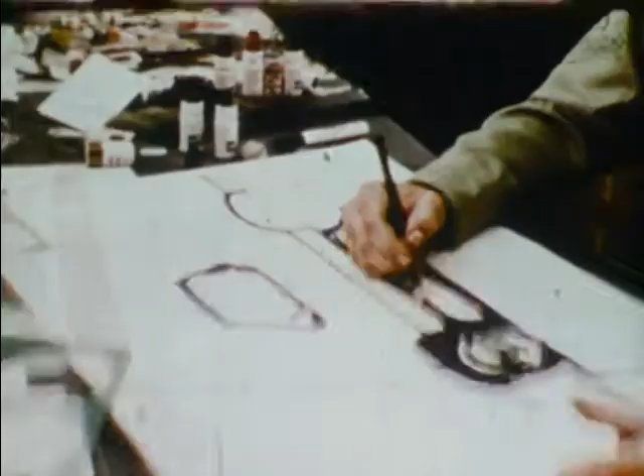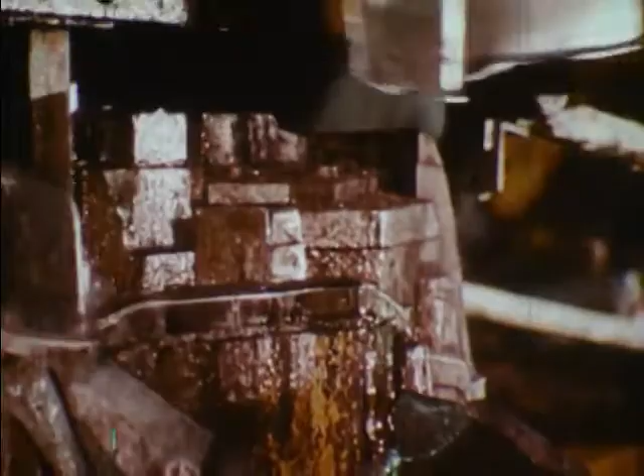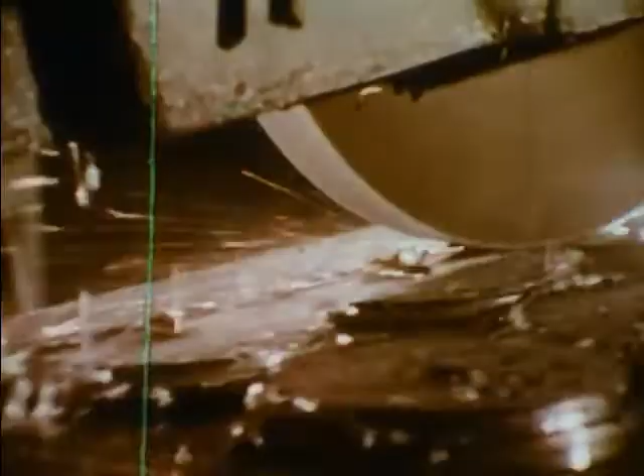What you gonna do when the time comes and you have to earn your way? What you gonna do when the time comes and you have to earn your pay? What will you do when you're finally on your own?

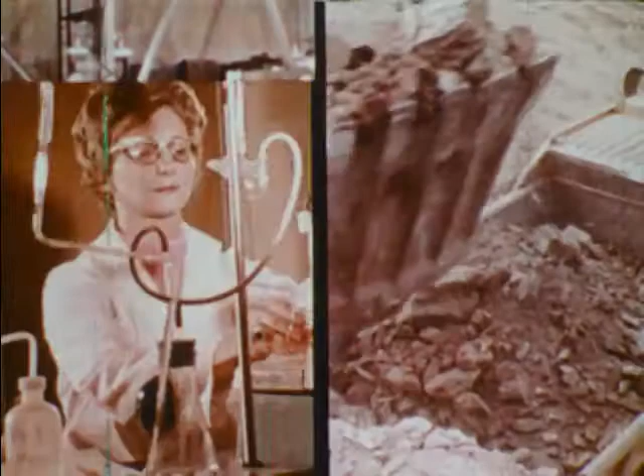Sooner or later, each of you will say goodbye to your classrooms, to enter the world of work. A world none of you made, but you can help make better. A world that permits you to be self-reliant, to pay your way from the salary and wages you earn for work performed in a variety of career occupations.

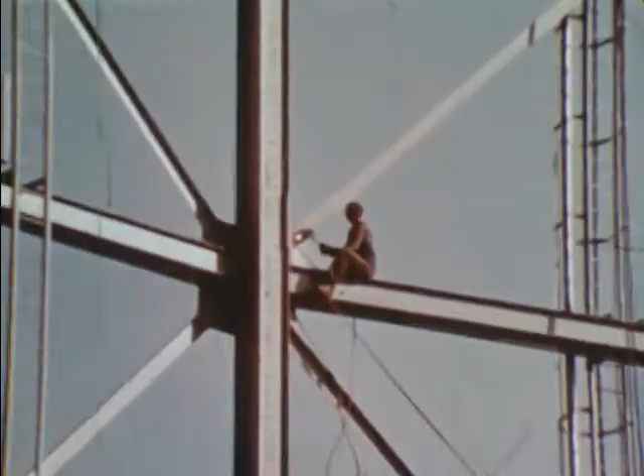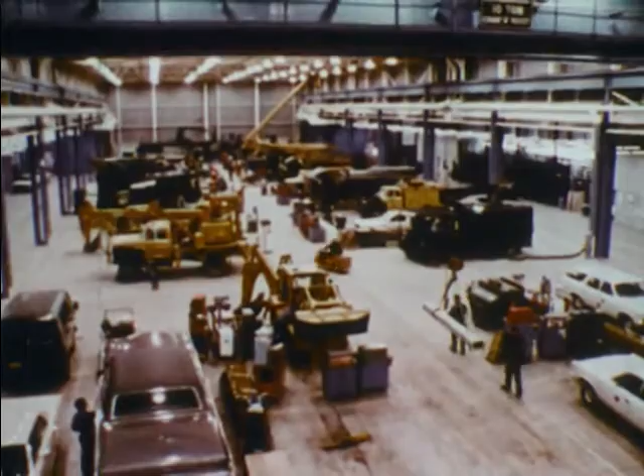Time spent now, planning for that world, may be the best investment you ever make. This film will tell you about one career area, open to young people, mostly young men. Before it is over, you should be able to answer for yourself the question, is a career in machining for you?

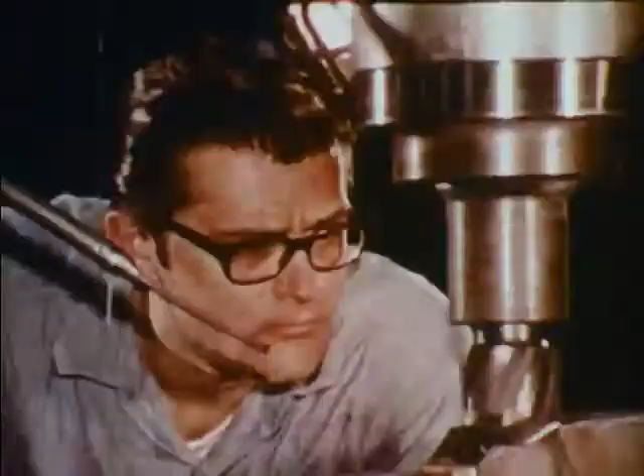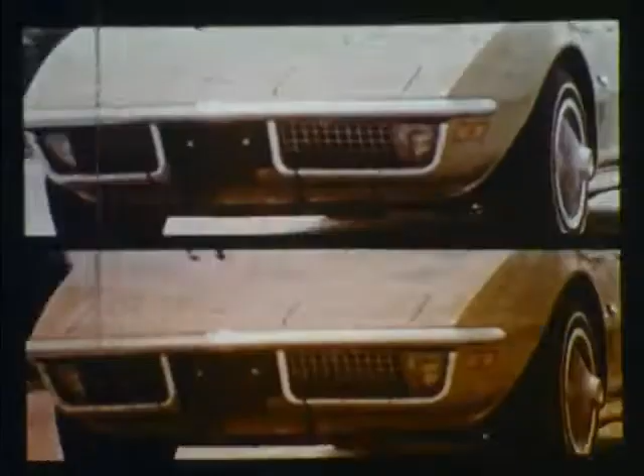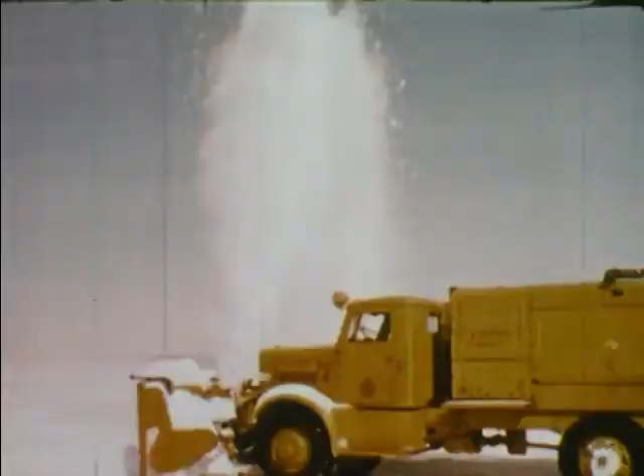The wonderful machines of today and those of tomorrow, amazing to everyone, young and old, those inclined toward engineering as well as those merely curious. You yourself, no doubt, have watched these machines in action, at construction sites, on the road, in laboratories, on the TV screen, surprised, many times astounded by the complexity of their many parts.

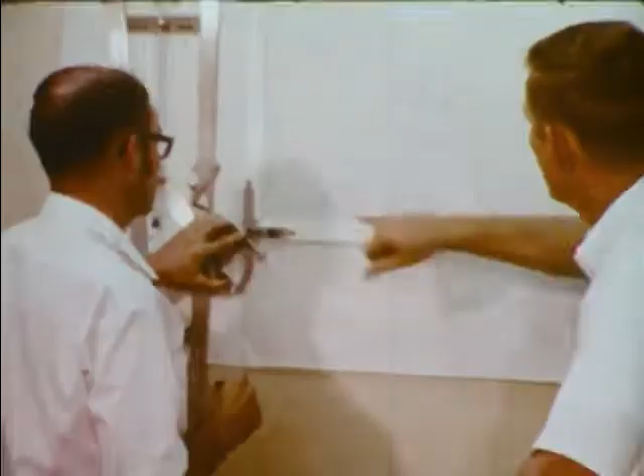But do you wonder how these machines came into being? Not only how they are invented, laid out on drawing boards, but who it is that takes raw metal and cuts and shapes, drills and fits all the parts so that they assemble first into prototype design models. Prototype models that serve as patterns for the thousands and thousands more to be produced on assembly lines.

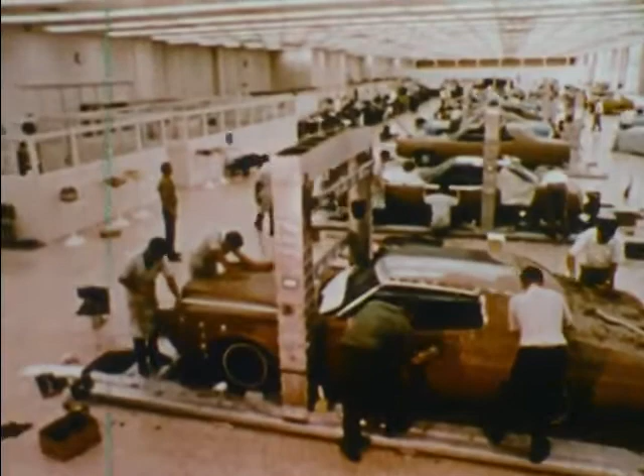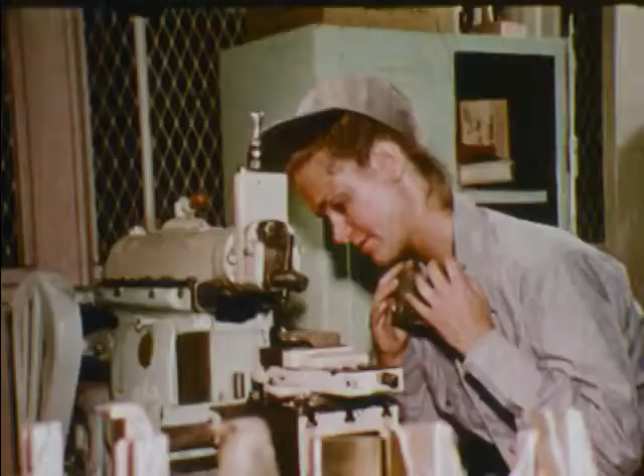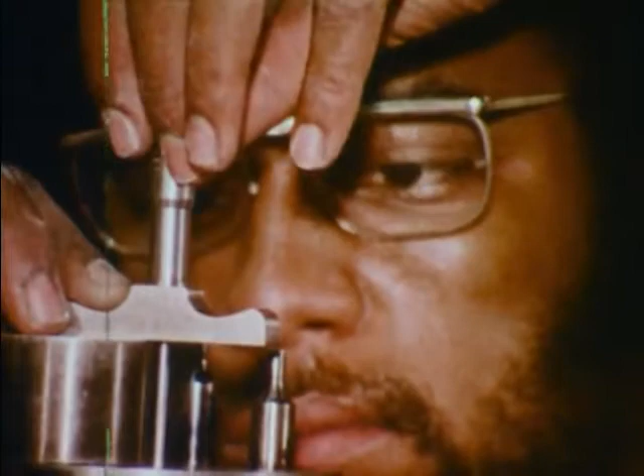If actual fabrication of machines interests you, if cutting and filing and grinding metals of all kinds, and other materials too, have a fascination for you, if making and fitting parts together the way a blueprint will tell you to, working to tolerances as close to 10 millionths of an inch, then you may be in line for a job in machining.

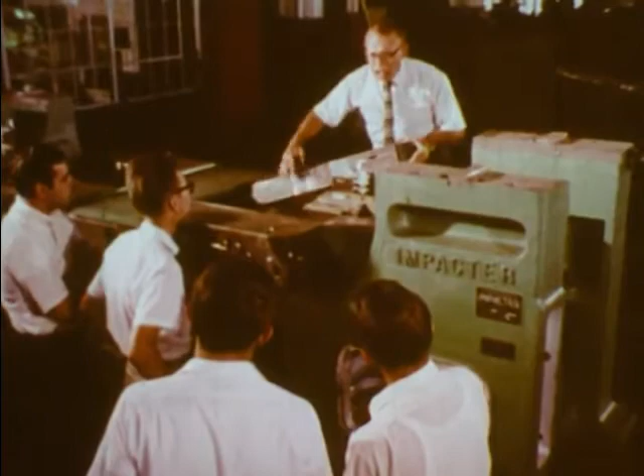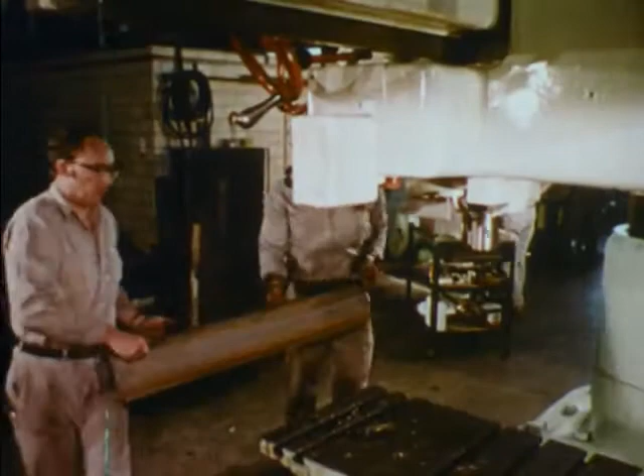Job specialties employing over 1 million skilled people, paying well above average, providing training to young people for continuous improvement in their skills, and still better salaries. One warning: physical demands on machining workers can be great, more than many women are willing to stand.

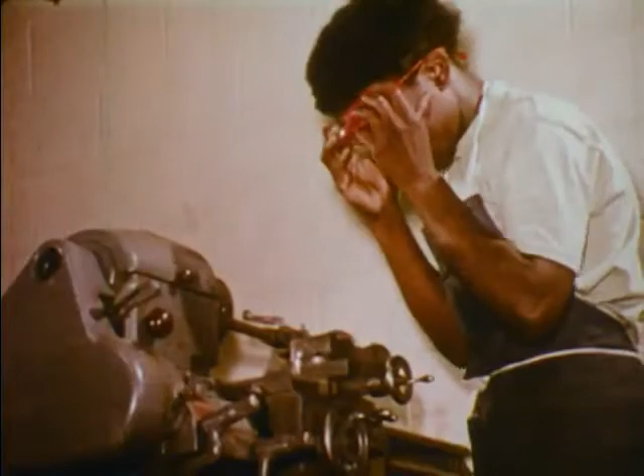Okay, you say, maybe that could be my thing. Work with my eyes and my hands. What about a machining job? Is it a dead end? Can you get ahead? Good question.

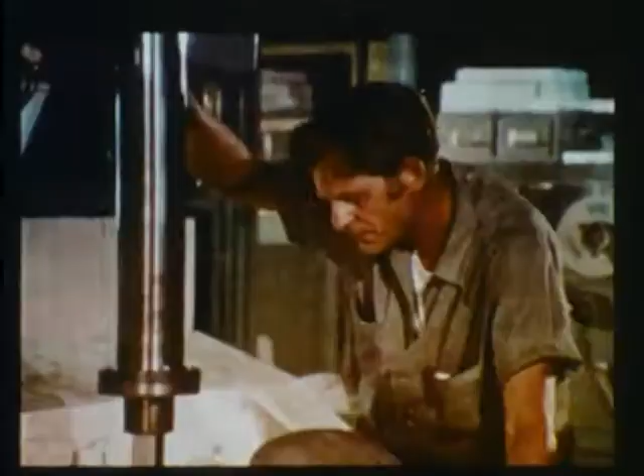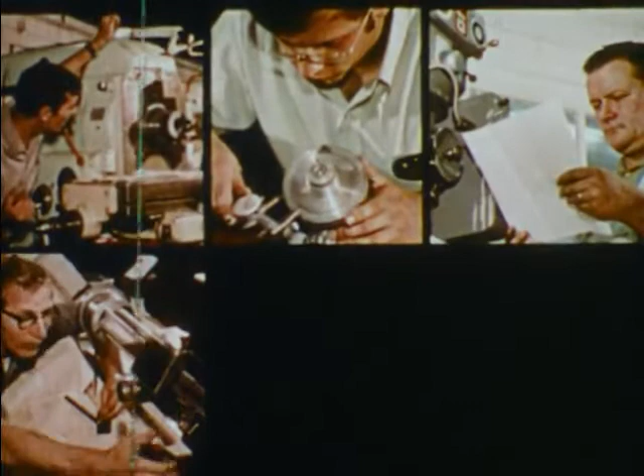There are workers at many job levels in the machining occupations. Each level is an opportunity for advancement. Among the skilled are all-round machinists, tool and die makers, instrument makers, machine tool setup men, and layout men. Then there are machine tool operators, the largest category and less skilled.

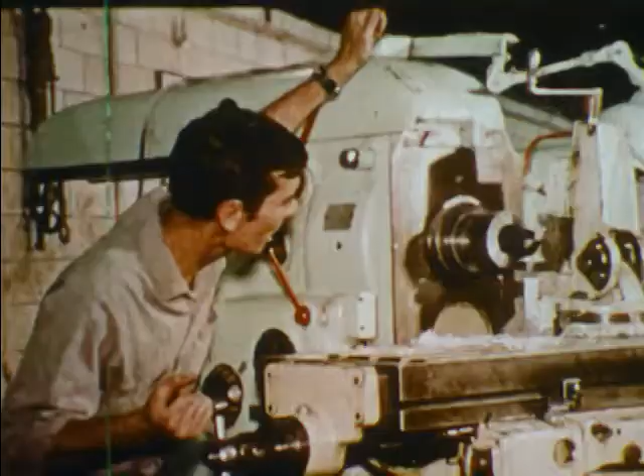Like to know what an all-round machinist does? Putting it simply, you might say he uses machine tools to make metal parts. He may set up and operate every one of the machines in this large shop.

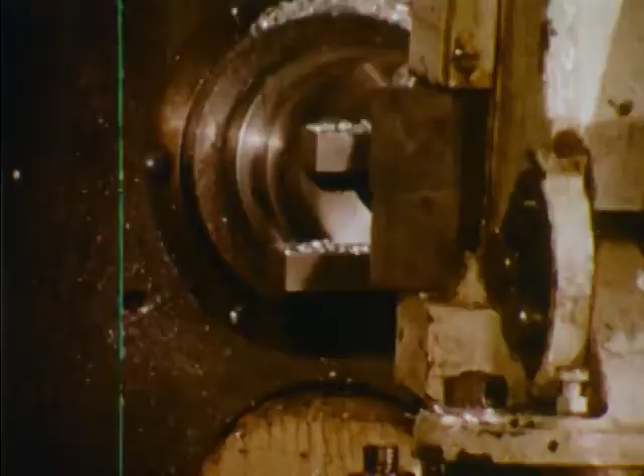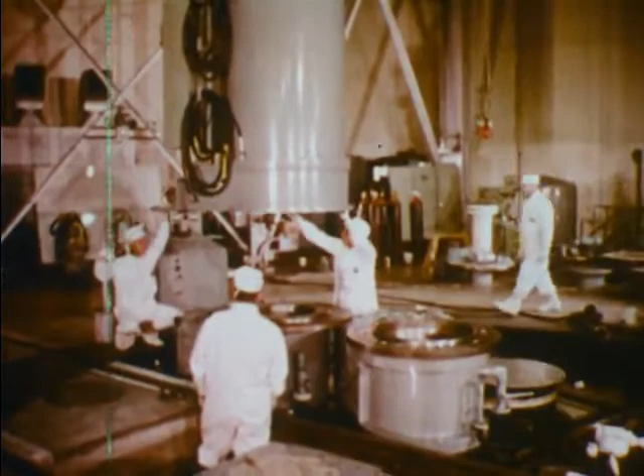When the machinist turns this block of metal into the intricate part called for by precise specifications, it could be a part for this unusual vehicle used at airports, or a part for a new type of generator being installed in a nuclear power plant, a part for any of 100 different modern machines.

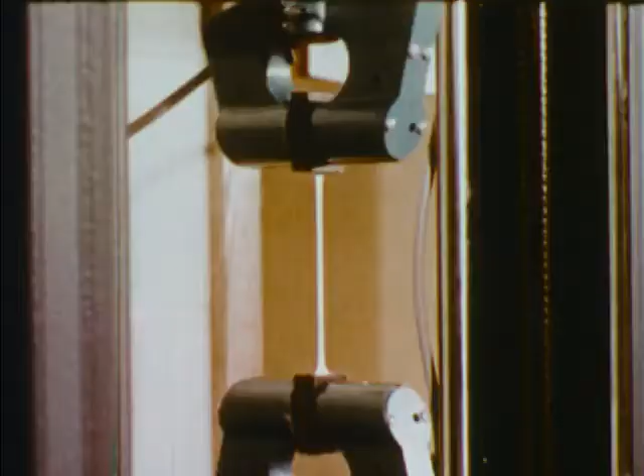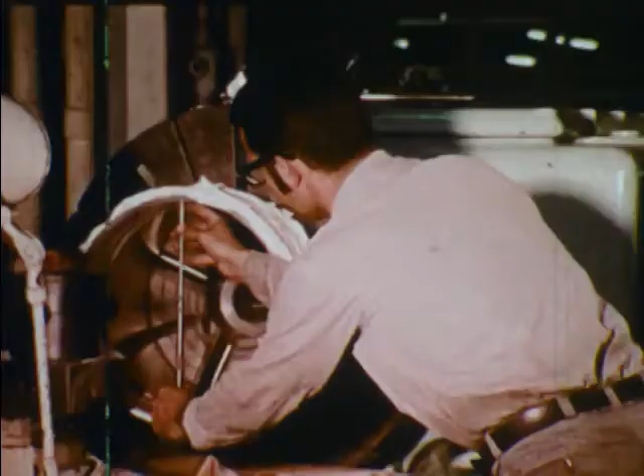Because machinists understand what each machine tool can do, and because they know the working properties of many metals and plastics, all-round machinists can plan and carry through the operations necessary to machine a specified part. The skill of the all-round machinist is reflected in the accuracy of his work, and he constantly checks using precision measuring instruments.

Often, the machinist finishes the work by hand and assembles the parts by hand.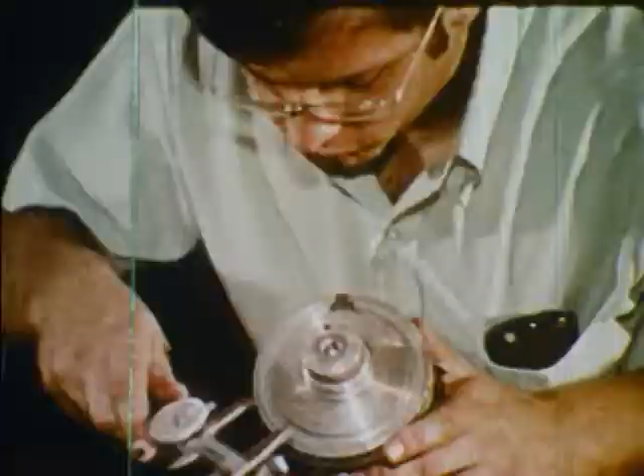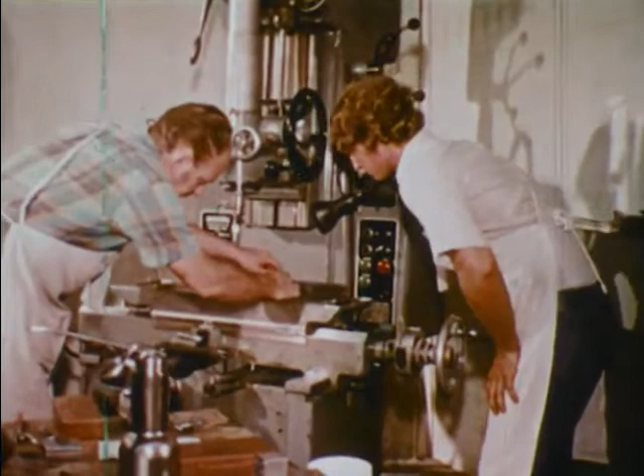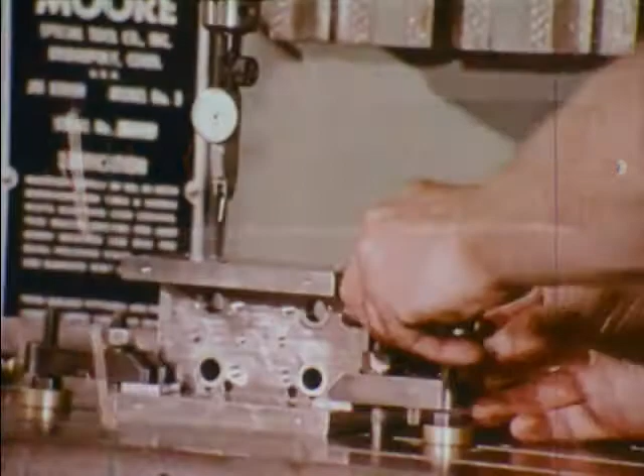Tool and die makers are highly skilled and creative. Their products, tools, dies, and special holding devices, are the basis for mass production in metalworking. Tool and die makers know how to use almost every type of machine tool and precision measuring instrument, have a broad knowledge of shop practices and mathematics and of all manufacturing metals and alloys, and can do precise handwork. Tool makers are rated high among machining workers.

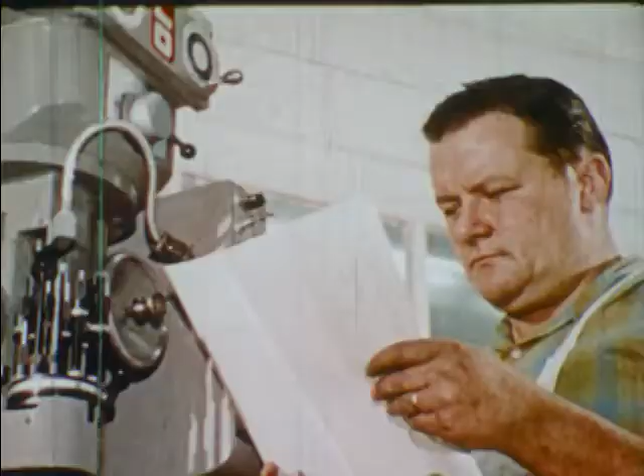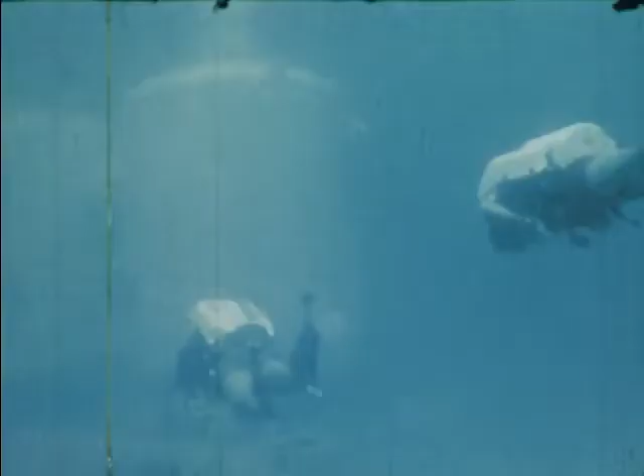Scientific and engineering research in medicine and medical devices, research in space machines, research in pollution, in underwater living, are translated into laboratory models by instrument makers.

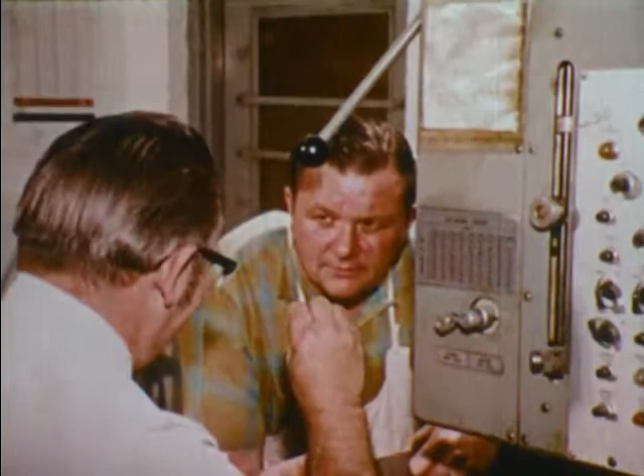These skilled people work from rough sketches or detailed blueprints, many times from a verbal idea. Their skill in operating machine tools, as well as their ability to handcraft metals, enables them to develop parts which do not vary from specifications by, at times, more than 10 millionths of an inch.

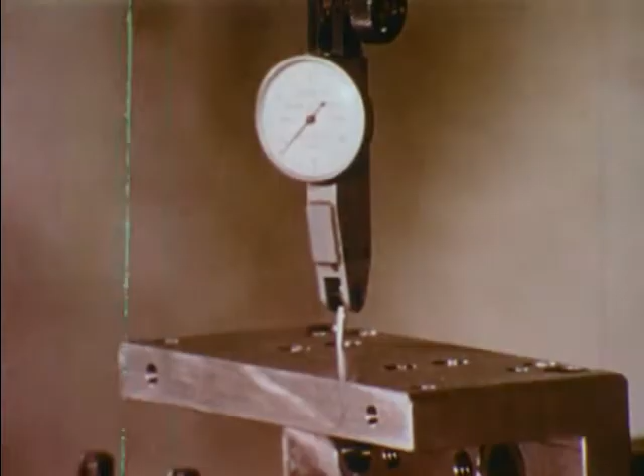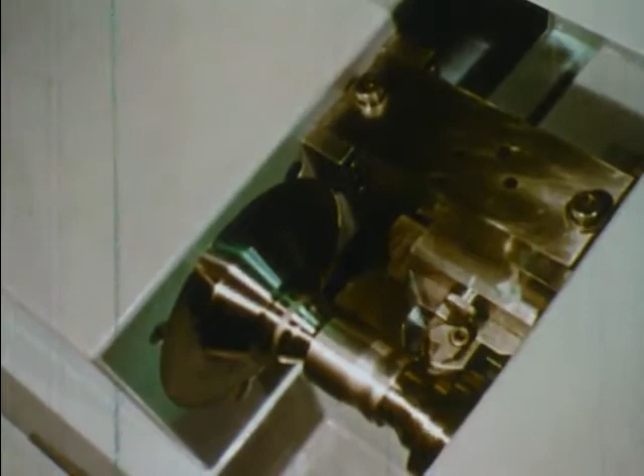Plants and machine shops that do large volume machining use skilled specialists, setup men. They are the ones who set up the machine tools so less skilled machine tool operators can use them. They set the operating speeds, operating sequences, adjust the guides, stops, and other controls. Although many metal cutting machines today are controlled by punch tapes, the setup man has the job of making sure the machine is operating properly.

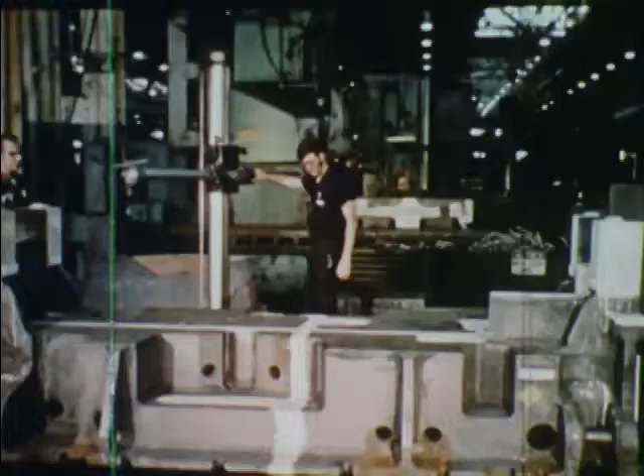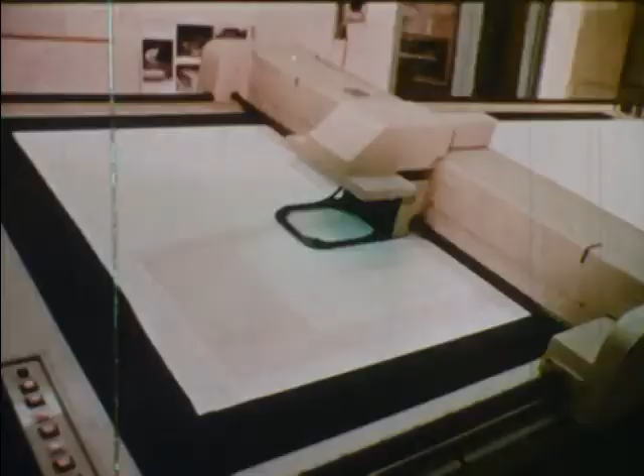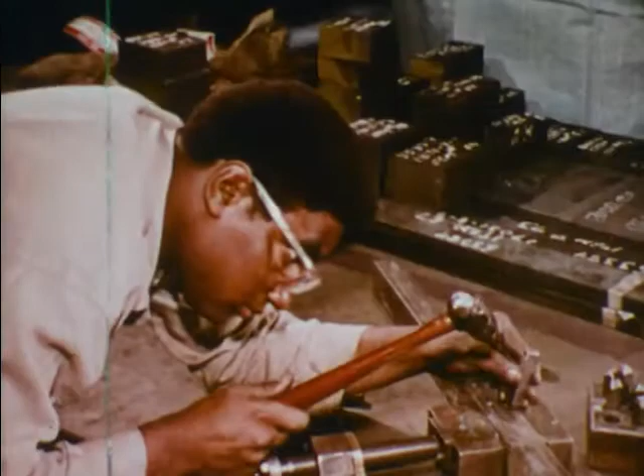Another type of skilled worker, the layout man, marks metal castings, forgings, and other metal stock to indicate where and how much machining is required. The layout man uses many instruments to prepare a piece for machining. He must work with extreme accuracy. He's familiar with the operation and capabilities of all standard machine tools. His instructions are easily followed.

Machine tool operators work with a variety of machine tools, though most of them specialize on one or two.

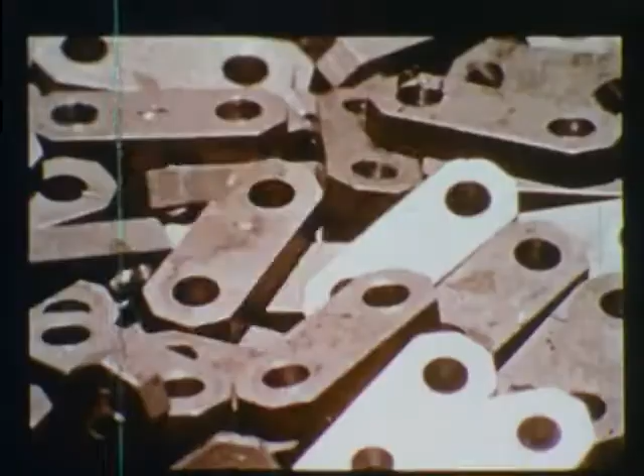These are the tools that turn out the thousands of identical parts needed on lines, where all sorts of products are assembled, from trucks to typewriters, cranes to computers.

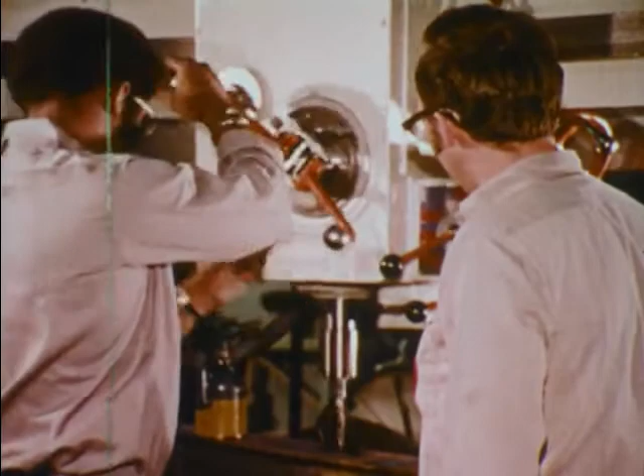A machine tool operator places rough metal stock in a machine tool and makes minor adjustments as necessary. The operation sequence and speeds have been set in the machine by a more skilled worker. With experience and training, the machine tool operator can advance to a more skilled category.

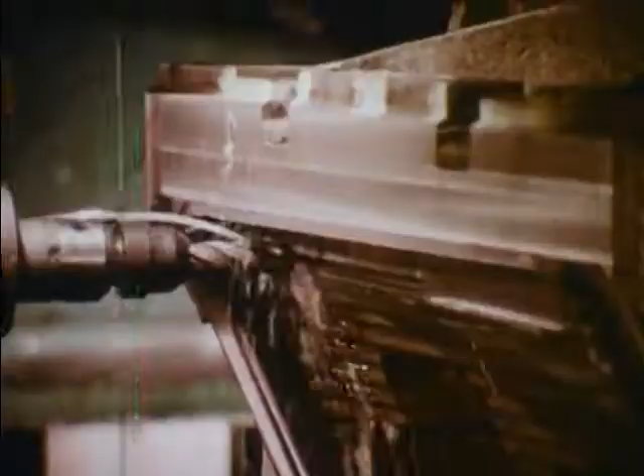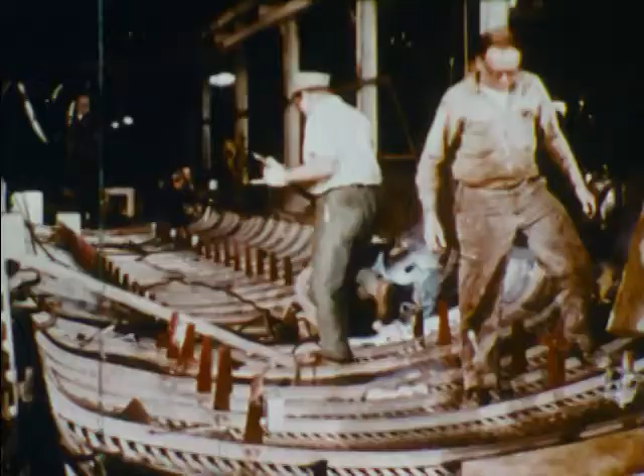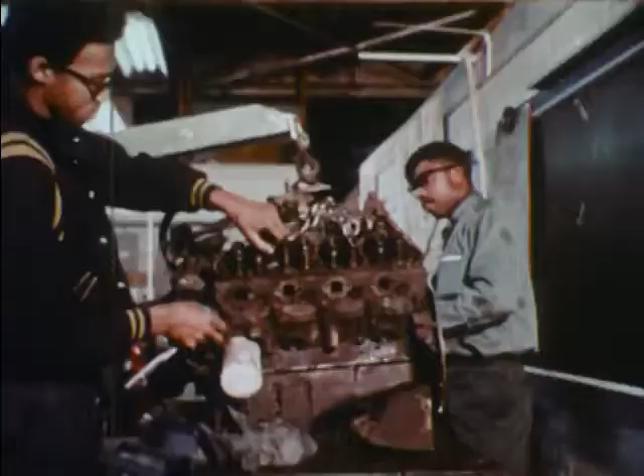Where will you find all the people and all the machines you've seen making everything? You'll find the bulk of the more than 1 million machining workers where machinery is being built: transportation equipment, fabricated metal products, electrical machinery, and electrical equipment. And you'll find some working in railroad repair shops, in maintenance shops in textile factories, and paper, glass, and chemical plants. And of course, in the armed services.

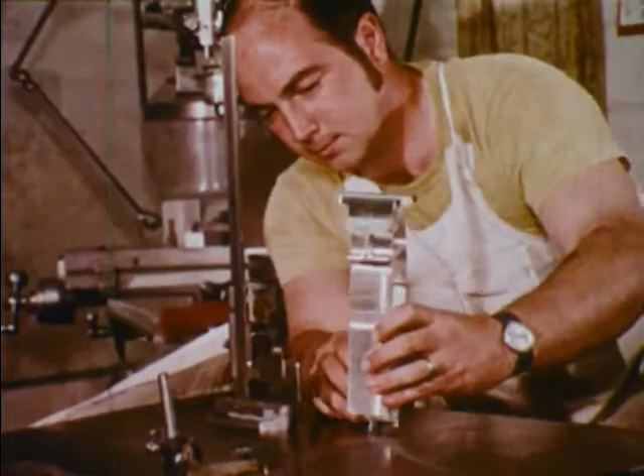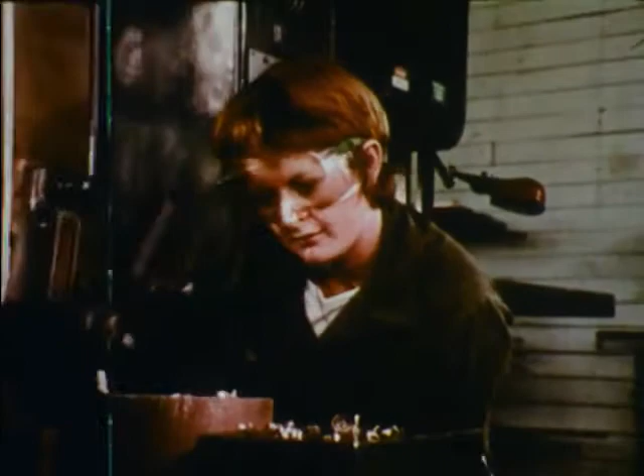Other machining workers are employed in research laboratories where unusual creative ability is required to carry out the requirements of research scientists and engineers. And machining workers are required by the armed forces at military facilities throughout the world, where they repair and modify metallic and non-metallic parts for all types of military machines.

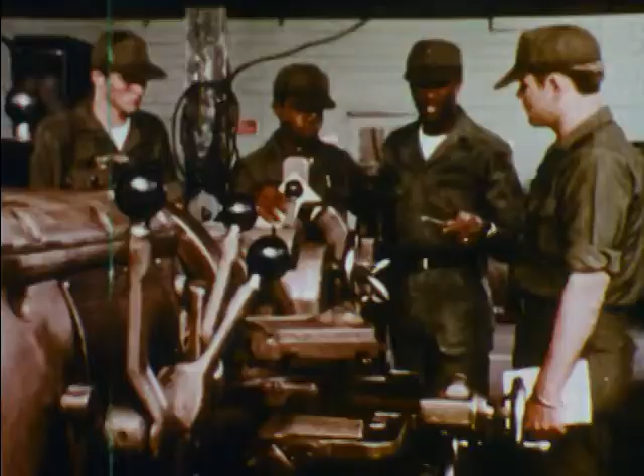Training in the armed forces includes learning how to operate all types of machine tools, which enables service personnel to get high-paying, interesting jobs in industry when their time in the service is completed.

You'll find that wages in the machining occupations compare most favorably with those in other industrial occupations. Rates vary in different areas of the country.

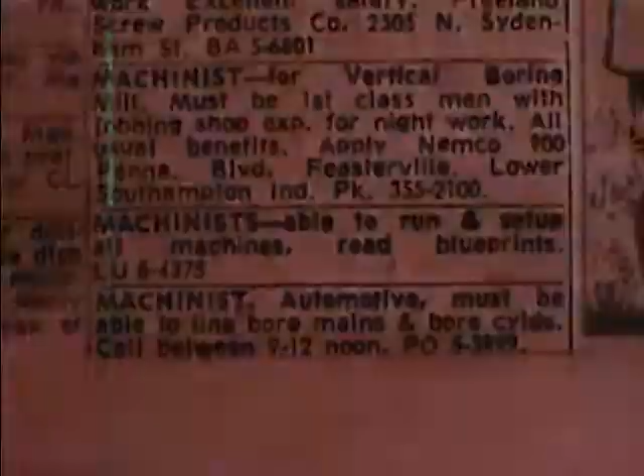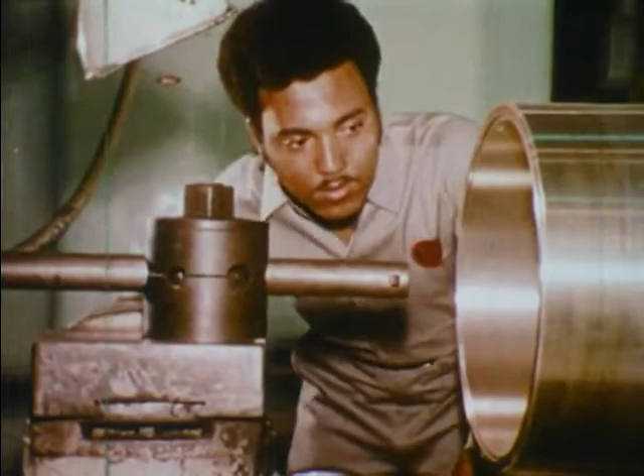Apprenticeship is the usual way you enter the skilled machining occupations. Tests and interviews help determine whether an applicant has the aptitudes and temperament to perform this type of exacting work. Good vision and judgment of depth and distance are a basic requirement, as is good hand and eye coordination.

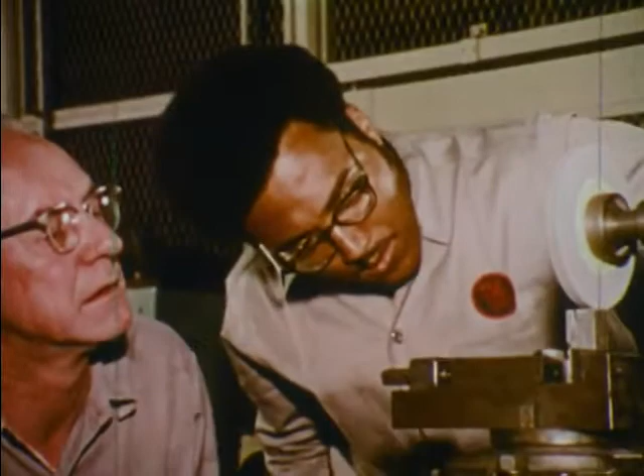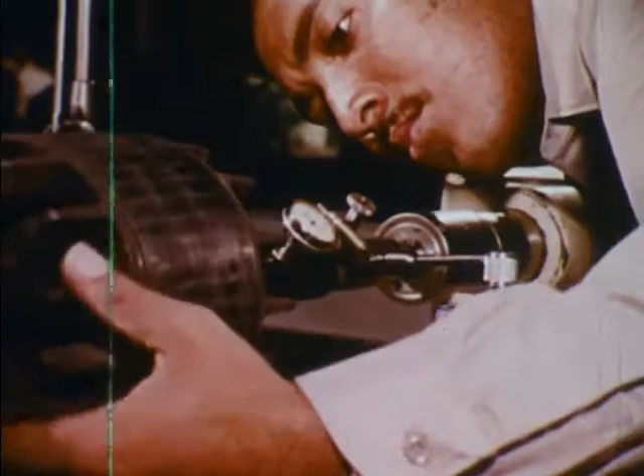During the apprentice's formal on-the-job training period, he learns all aspects of his chosen work. He gets to know the hand tools and the different machines, their operations, their capabilities. He's taught the use of measuring instruments, from the very simple to the very complex.

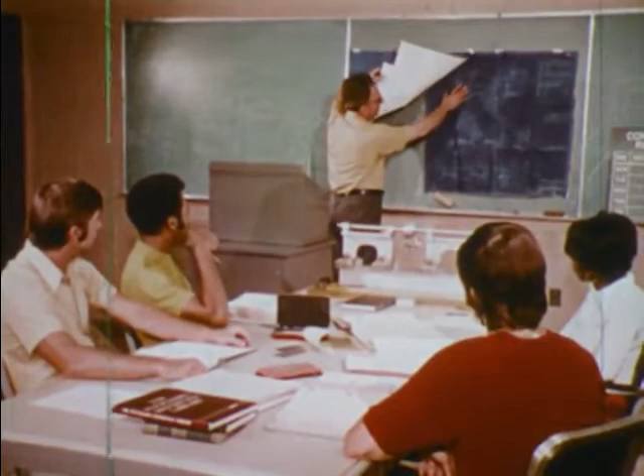Classroom training includes blueprint reading and mathematics, usually taught in the local high school through special arrangement with public school authorities. Those with special aptitude may become programmers, preparing the coded tapes which operate numerically controlled machines.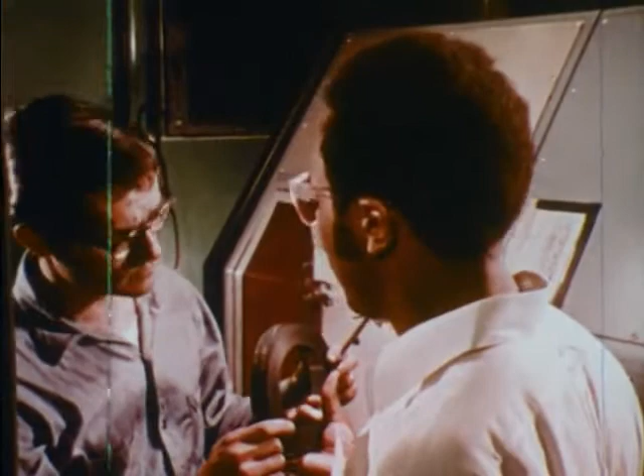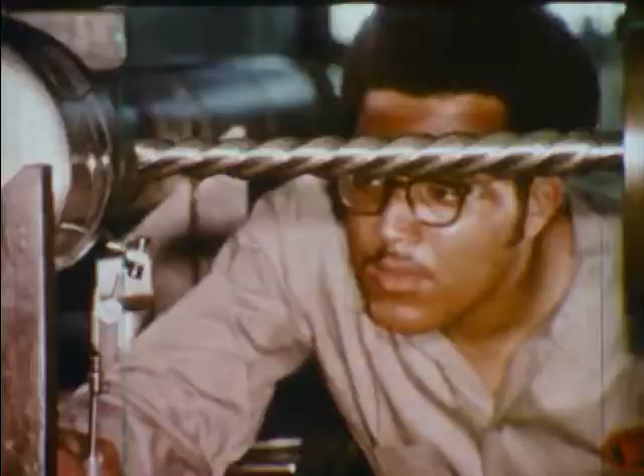Many move ahead to become machinists, tool makers, instrument makers. A good many advance to supervisory positions and to technical positions such as tool and die designer. Some open their own shops, becoming subcontractors to the firms they originally worked for.

Since industrial plants and research establishments requiring machining workers are located in almost all parts of the United States, you can almost pick the section of the country in which you'd like to live.

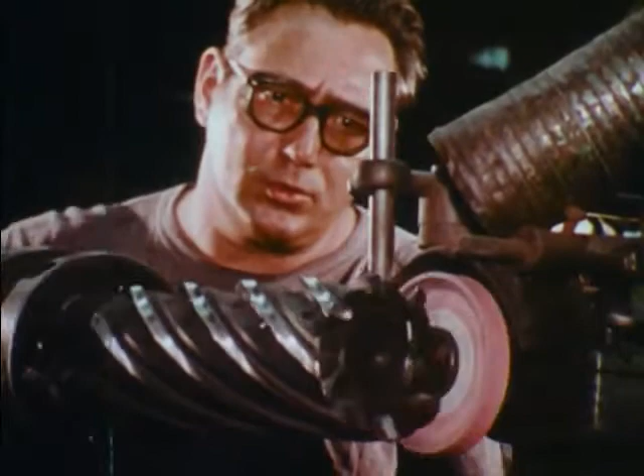If you think you might be interested in a career in machining, take this quiz. Simply answer yes or no to each question. Ready? Let's go. Do you like to work with your hands?

Are you handy with tools, with equipment? Can you be counted on to carry out assignments to completion?

Would you like to help bring to reality the ideas of research people? Would you like to program machines to operate automatically by the numbers you punched on tape?

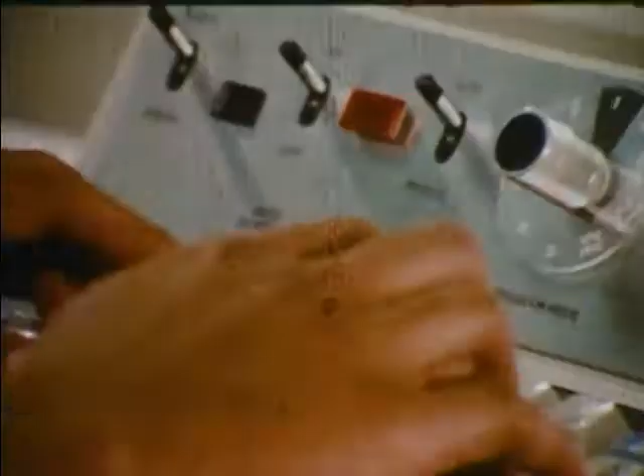Would you like to understand the properties of metals and make them conform to your demands? Are you imaginative, and can you visualize end products from rough sketches?

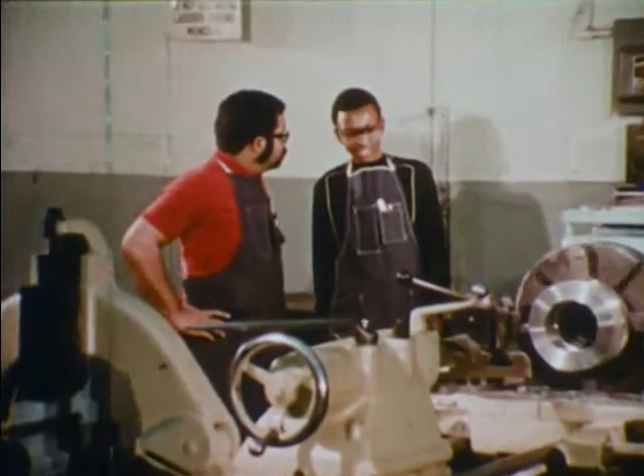Our quiz is over. Now, let's see how you made out. If you've answered yes to more than half the questions, a career in machining may be for you.

However, before you decide, be sure you know or find out about the many other careers open to young people in the world of work. You'll want to see the other films in our library of career counseling films and choose from among all the careers you like and feel you're suited for.

If you still feel your choice is machining, get all the information you can about it. Discuss your interest with your high school machine shop or industrial arts teacher and your guidance counselor. Listen carefully to their advice.

It won't hurt to check in at your local U.S. employment office either. Ask about machining apprenticeships in your area. Visit your local recruiting office. There you can find out about the opportunities available for training in the machining occupations.

And if your choice stands up, get moving toward your goal. Take the courses your counselor advises you to, courses that will help in your apprenticeship.

Enroll in the machine shop program in your high school, or if there is none, take instruction part-time at an area vocational school while continuing your regular studies at your regular high school.

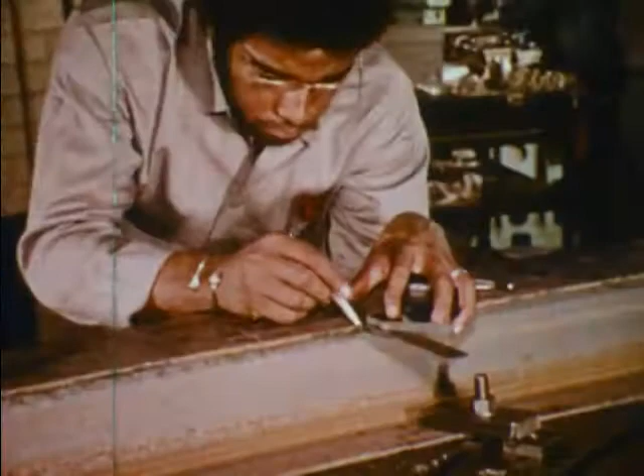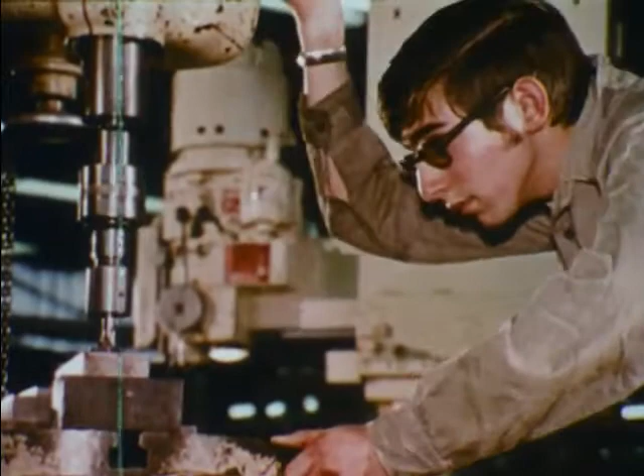If you do, chances are good you'll start on the job as an advanced apprentice and receive higher than starting wages. The prospects are that you will be given credit for your in-school training and will be permitted to finish your apprenticeship and receive the top rate in less than the regular 4 years.

Instruction after high school in the machining occupations can be obtained at technical institutes and some junior colleges, and of course, in the armed services.

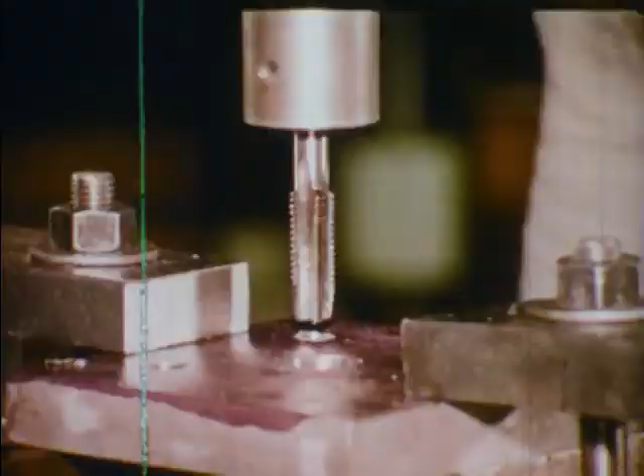Plan ahead, so you'll be ready to take your place, your rightful place in the world of work. Ready and able to advance in skill, to develop your ability, to grow in stature, to take responsibility in the career you have so carefully chosen.

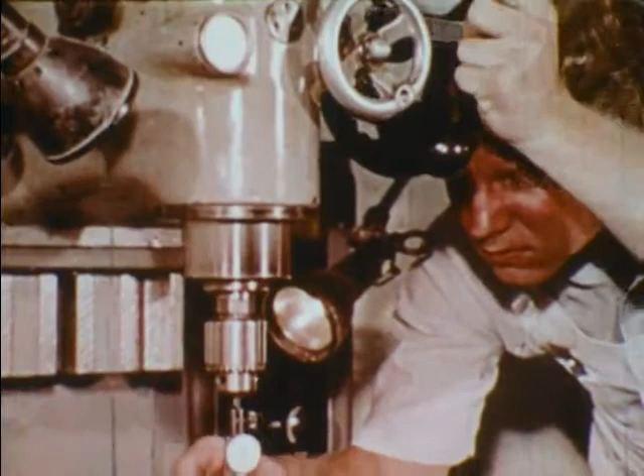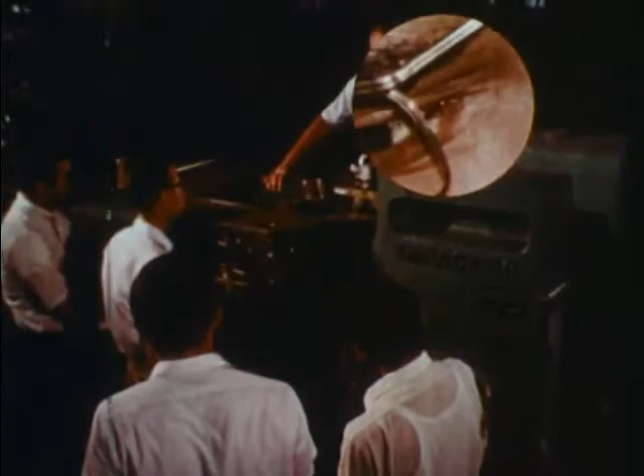What you gonna do when the time comes and you have to earn your way? What you gonna do when the time comes and you have to earn your pay? What will you do when you're finally on your own? What will you do? What will you really do?